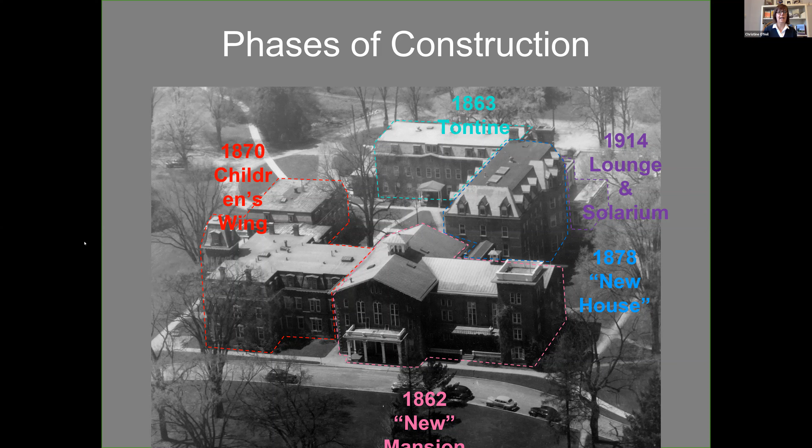But as they became more successful socially and economically, they began to build the Mansion House that we know today. And that Mansion House was a reflection of their values and a manifestation of their success as a communal society.

The evolution of today's sprawling landmark began with the 1862 main house. Erastus Hamilton was the lead architect, but the community was deeply involved in the design. The house is done in an Italian villa style, built in the style of popular designs at the time. The design featured large central public spaces surrounded by small private spaces, which encouraged and reinforced the importance of communal living. Next slide, please.

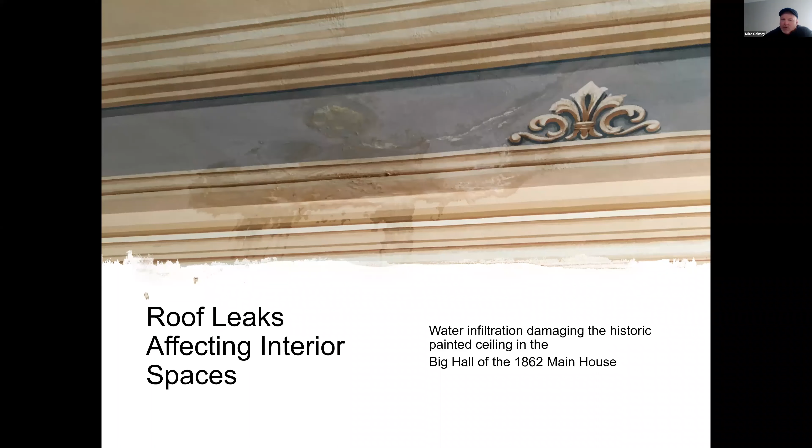So to jump into the inside of the building, here's an example of a roof leak from the 1862 building that has affected the Trompe l'oeil painting and the ceilings and the walls.

Here are 3 different places on the building where water infiltration has created problems in apartments and common areas. The first photo on your left is in an apartment in the 1862 building.

I can tell you already that's due to incorrect mortar on the outside of the building holding moisture in. The moisture has been sucked into the building throughout time and creates issues with the interior paint surfaces on the plaster.

Picture number 2 is also an apartment on the 3rd floor in the south wing of the building, where that is definitive ice damage due to inferior and deteriorated flashings on a dormer situation, along with the chimney situation. The 3rd picture on your right is the library corridor that connects the 1862 building to the new house, and that is a reflection of water infiltration from splashback of 3 different roof areas that compile and splash down on the ground and back onto porches and back onto the building itself.

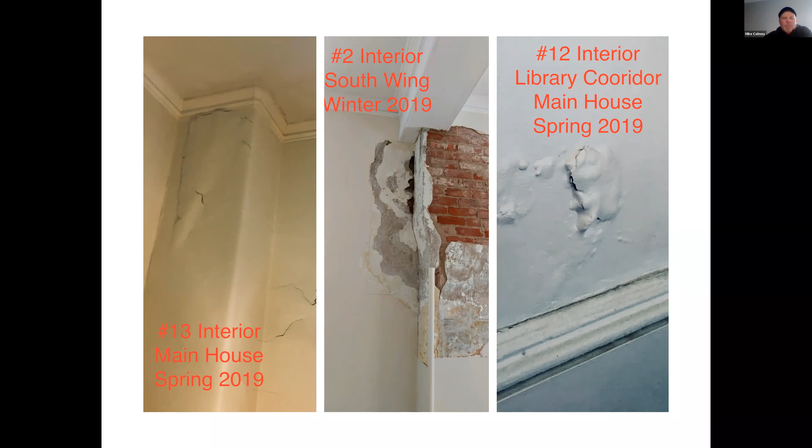Unfortunately, no one knew at the time when they were replacing mortar with modern mortar that you could not put Portland cement in mortar joints of an older building where mortar was actually a lime putty based mortar. The bricks need to breathe. Moisture comes in, moisture needs to be released.

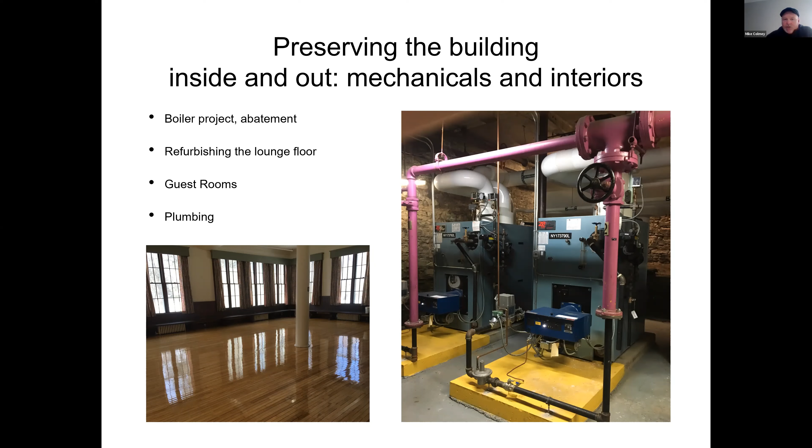Another example is the lounge floor project we recently did. We had the lounge floor refinished. Next slide.

In 2019, the previous curator, Abigail Lawton, and myself hosted a Cornell University Historic Preservation Planning Work Weekend where 35 students came, along with professors and alumni, and we worked on projects such as window work, porch restoration, interior faux painting. We also worked on the grounds as we could, doing restoration of the walking paths, although that particular weekend the weather was not very cooperative.

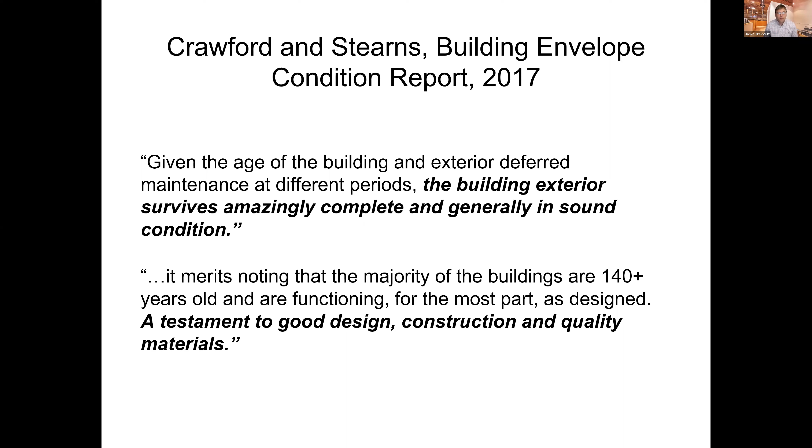And instead of rebuilding them, unfortunately, the thinking at the time, much like the mortar issue, was that you should abandon them and let the water fall to grade, or apply some half round gutter to the facade. And those actually failed too. All that water collection has been a problem for us. And I can go to the next slide, I think.

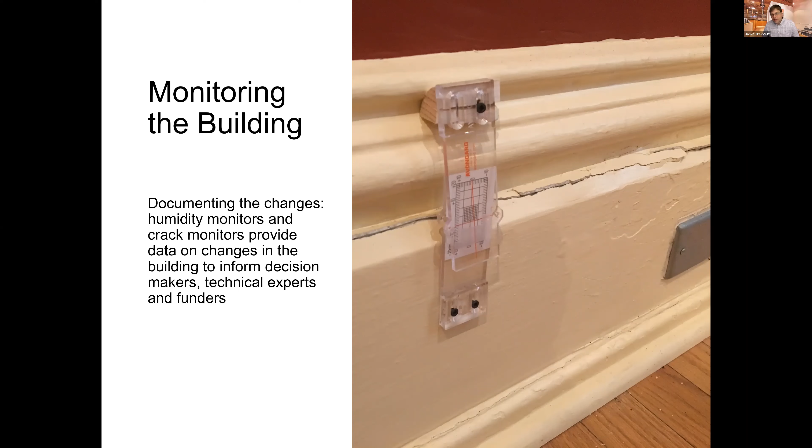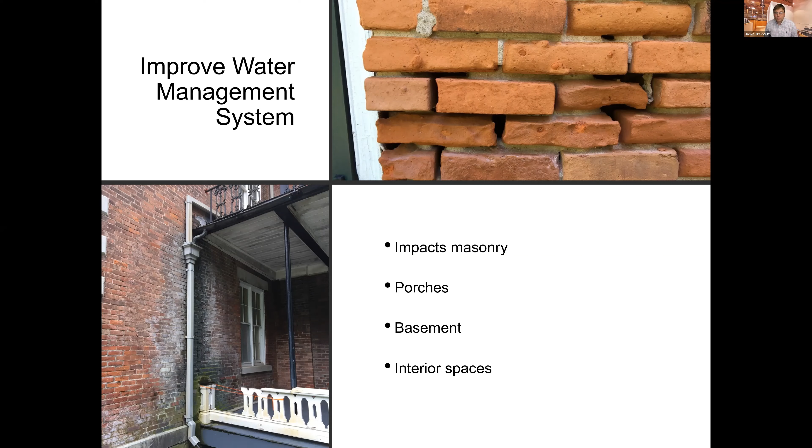Next slide, please. All right, so this is the culmination of, Chris, maybe a year-long process working with Crawford & Stearns architects out of Syracuse. It's actually going out to bid this week, and work will begin in 2021. These drawings address those water management issues identified early on as one of the major contributing factors to the deterioration of the facades.

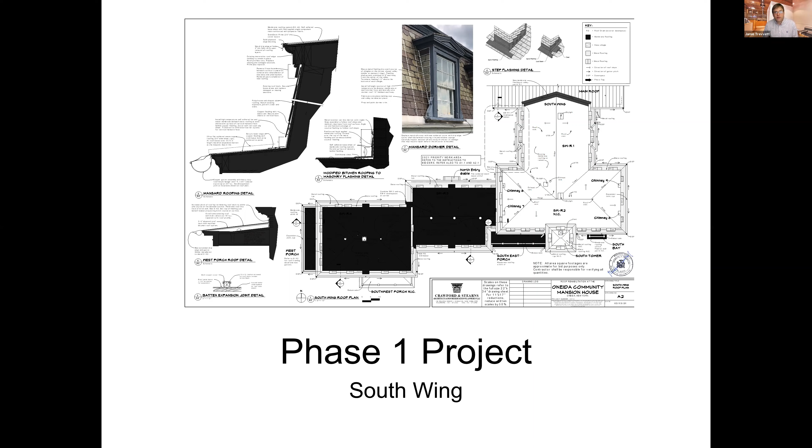We can keep going, I think there's a couple of these. It just shows you the effort that's gone into identifying the needs of the building and prioritizing those needs, and finding out what we can do with the money we have currently to protect the building as best we can. We're going to do it in a stepwise fashion - we can't afford it all today, and Jonathan will speak to that in a minute. But this is the first of a couple projects. We can take the next slide.

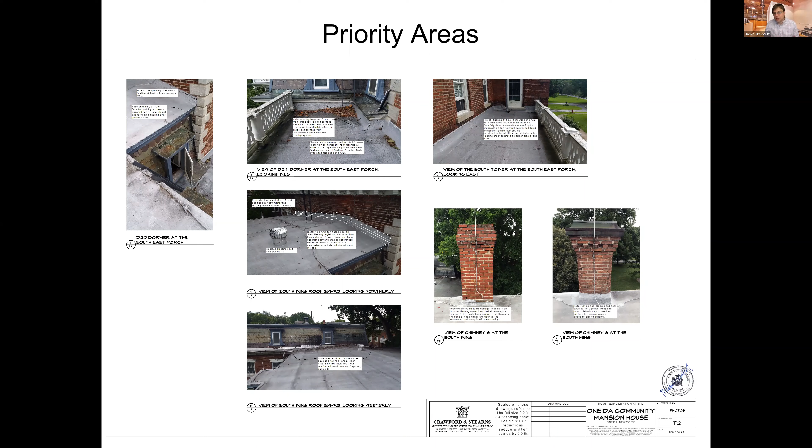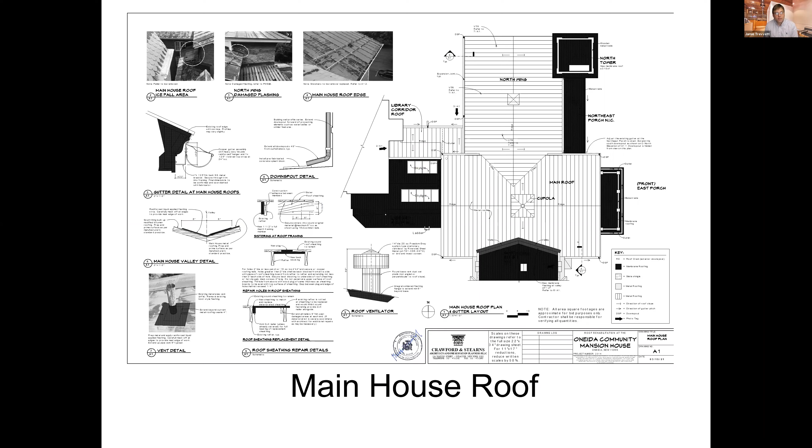Again, some more details - we're handling snow and ice management too, impacts, so it doesn't damage facades and brick, and we don't get ice dams and things like that. So all of this is managing Mother Nature. I think we can go to the next slide.

Future projects. So, is this where I'm going to depart, Chris? Or I'll let you take this.

Okay, this was a design for a gutter project, which we hope will be part of the project that begins this year. My understanding is we need to start from the top of the building down, as Jamie and Mike have outlined, and we'll be beginning a Save the Roof water mitigation project this year.

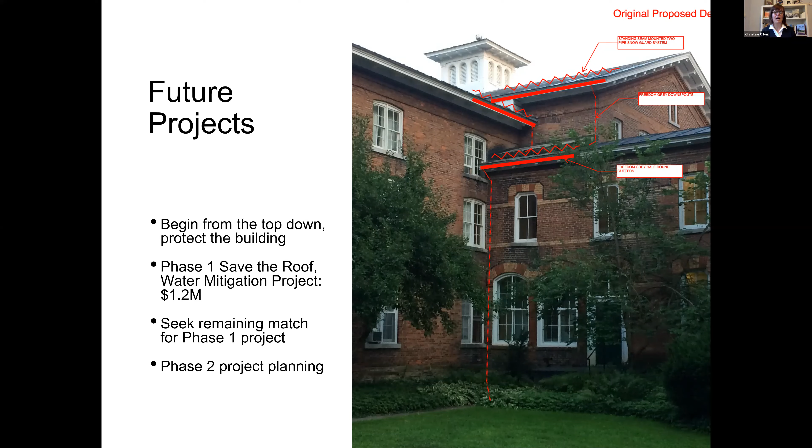We're seeking the remaining match, which Jonathan will talk a little more about. And then we're going to begin phase 2 project planning and grant writing this year. Next slide, please, Chelsea.

Now I want to introduce our board chair, Jonathan Palika. Jonathan is a financial planner in his real life, but he can be found at the Mansion House almost as much as anyone. He has over 20 years of institutional knowledge at the Mansion House, serving on various committees. So he's the perfect person to lead us at this moment.

I just want to echo what Jamie said, the planning has been 2-3 years, actually before, when Pat Hoffman was the director and they worked on the building envelope condition report. But now I'm going to ask you a couple questions, Jonathan, to start you off. Can we go to the next slide, Chelsea?

Sure, and this goes back to when we started with the building envelope condition report, and we go back through our $6 million giant book and figure out how do we do this and pull it off in phases. So where we are now in phase 1 would be a project that's about $1.2 million.